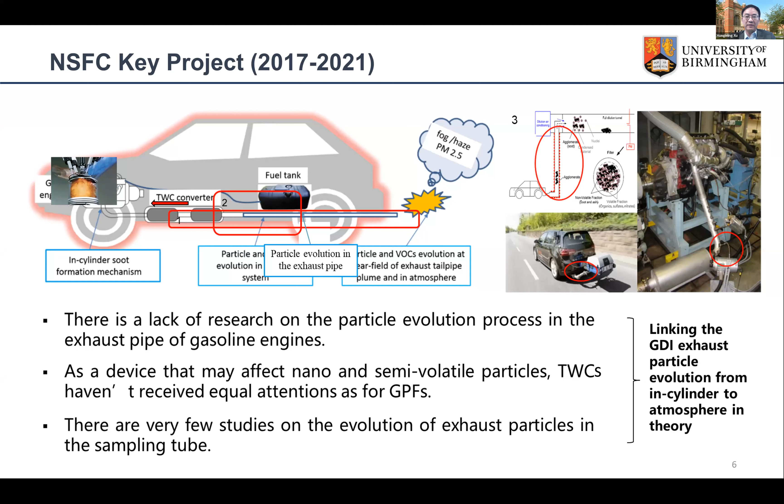This is one example of the active National Science Foundation Council's project with China for 5 years, in collaboration with Cambridge University as well, and Beijing University in China. The research is to study the evolution of emissions from vehicles, from the start of the formation of the emissions, and also the impact onto human beings and onto the environment as well.

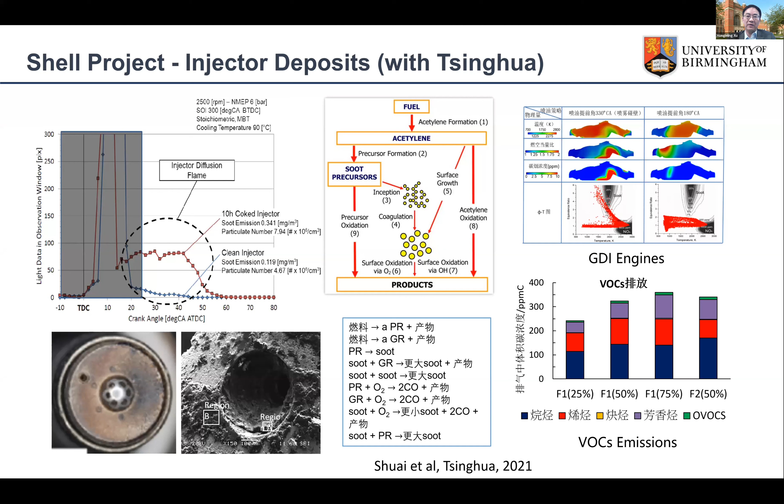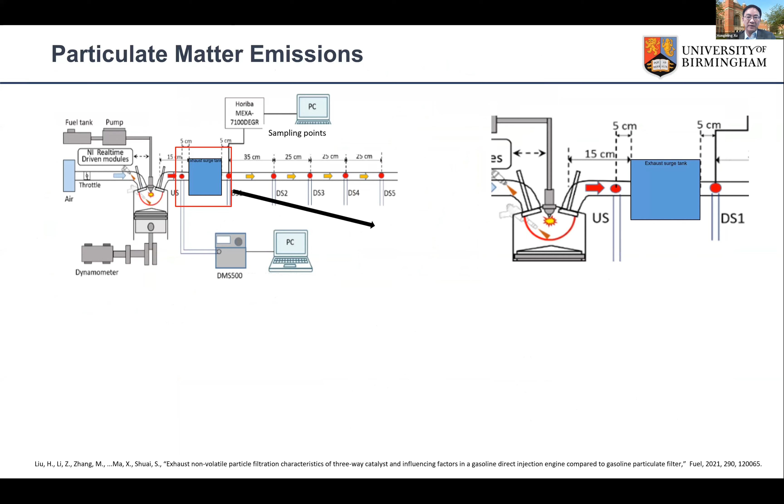And the research includes work in collaboration with Shell on injector deposits, which have a significant impact on the performance of the engine, especially for direct injection engines. We have been working with colleagues in Beijing University and Tsinghua University, and colleagues at Birmingham, using experimental and modeling techniques to study the particulate emissions for direct injection engines. This research is now extended to vehicles using electrical or electrified powertrains.

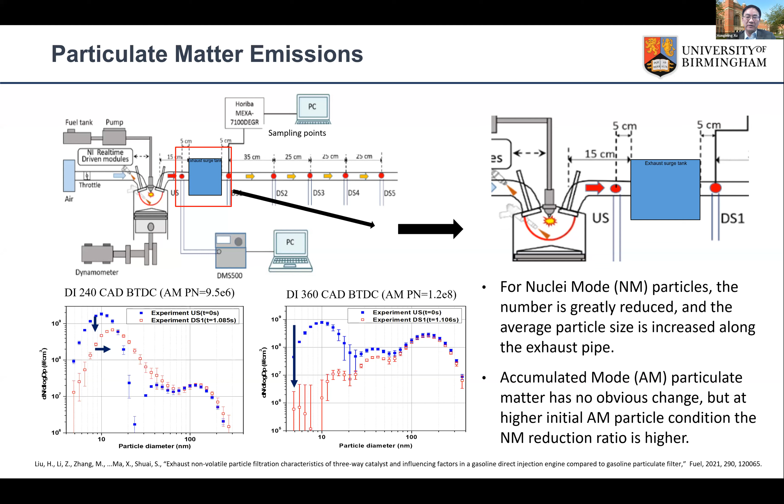The talk made by my colleague, Professor Roy Harrison, is one of the examples to show the work at Birmingham in collaboration with China. Professor Harrison is one of the lead scientists in this country working on vehicle emissions, and that work is now being extended to automotive research.

Again, in collaboration with China, here is one example: the project with the Suzhou Automotive Institute to work on electrified powertrains and vehicles, studying energy management and engine efficiency, using artificial intelligence for powertrain control, and improving vehicle efficiency in design, testing, and maintenance on the road. That is the future technology for vehicle control.

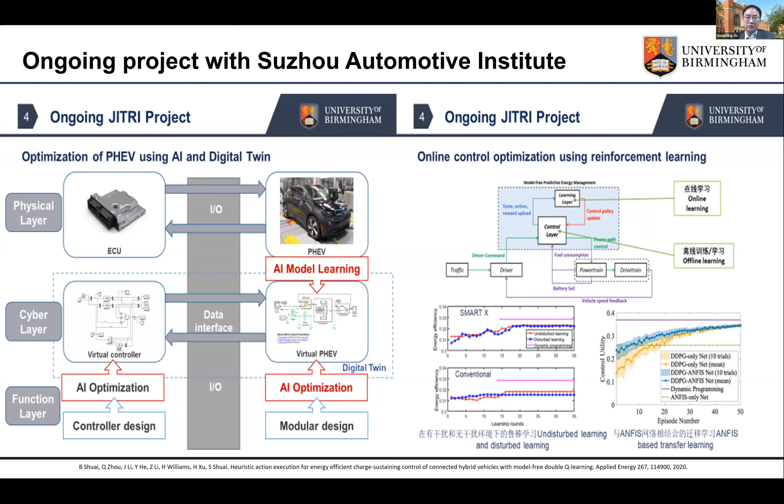With BYD, one of the largest automotive manufacturers in China and world leading in new energy powertrains for electrified vehicles, we study high performance combustion engines and electrified powertrain systems to achieve very high efficiency. The engine for the hybrid has reached 43% efficiency, one of the best in the world.

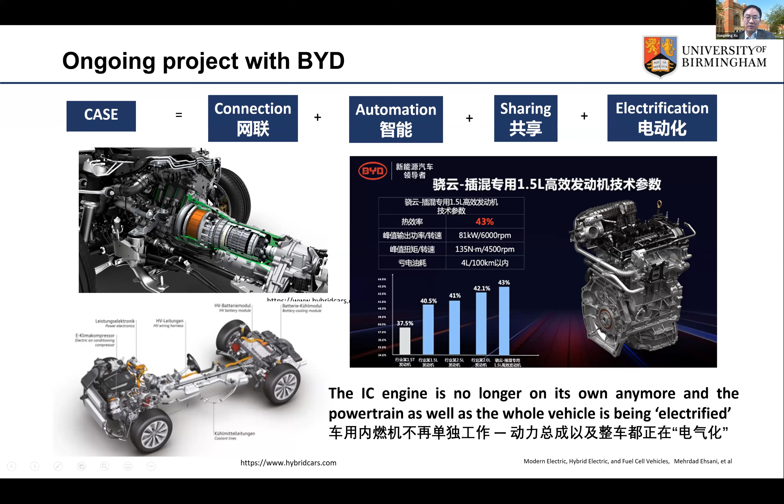With hybrid and conventional combustion engines, for many years we will see engines used in hybrids, so engine performance needs to be further improved and efficiency increased. In this project, we have developed autonomous artificial intelligence-based engine calibration methods using our own software for calibration on a production direct injection engine. The work continues for

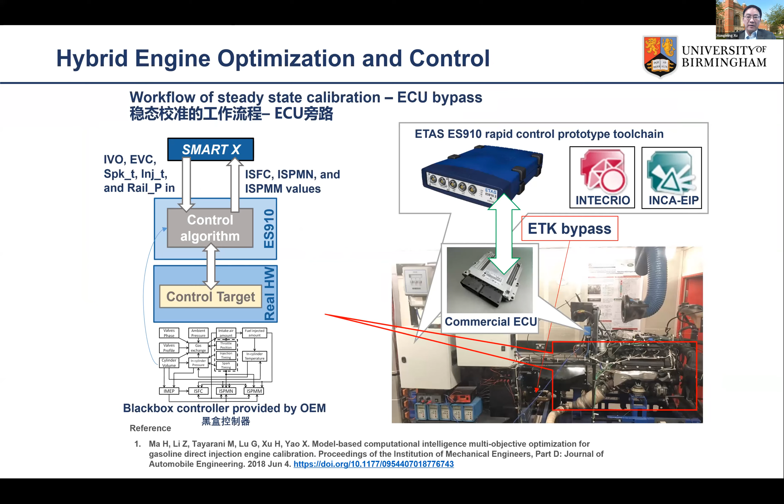hybrid and electrified vehicles and electrical cars. In the future, the engine-based testing facility will be combined with electrified powertrains and road information, using a virtual testing environment with big data and driving simulation.

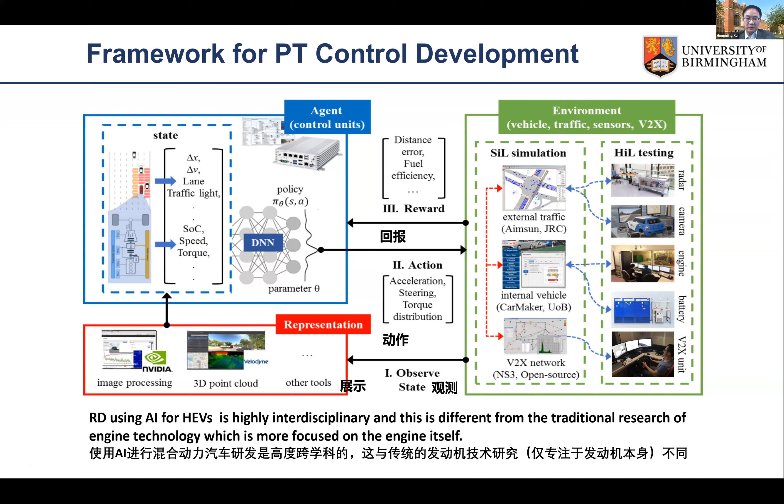Now we can study our vehicle's performance in our laboratory using both hardware in the loop and modeling techniques with artificial intelligence for future control of the powertrain and vehicle operation on the road. So that's a very short highlight of our current work with China.

Now we are moving to the new modern, so-called full modernization of vehicles, known as connection, automation, sharing, and electrification. There is a lot of work here, and we will be working with more and more collaboration with Chinese colleagues, and we hope to develop further advanced technology for our future vehicles.

So many thanks to all supporting our work. Without this support, this research cannot reach our goal for industry application and benefit to society, to the public. That is all from me, and thank you for your attention.

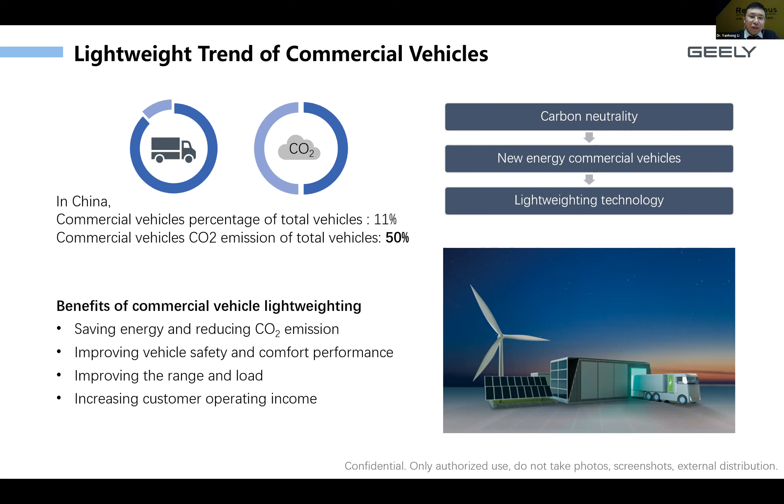There are lots of benefits of commercial vehicle lightweighting. For example, we could save energy and reduce carbon dioxide emissions, improve vehicle safety and comfort performance, improve the pure electrical range and the payload, and in the end the customer could gain more profit.

So what about lightweight technology? It refers to the use of modern design methods and effective means to optimize the design of automotive products, or the use of new materials, to ensure the overall performance of the vehicle on the premise of reducing the weight of automotive products as much as possible, in order to achieve weight reduction, energy saving, emission reduction, and safety comprehensive indicators.

I will give you an example about the lightweight technology implemented in body in white, which you may know very well. Body in white is the foundation of safety, durability, NVH, and vehicle handling, and is an important window to measure the technical level of automobile OEMs.

Next, I will give you some lightweight design technology implemented in Geely's commercial vehicles. Our philosophy for implementing lightweight technology in those commercial vehicles is based on two pillars: one is performance-driven material design, especially about safety, and the second is fuel economy-driven design.

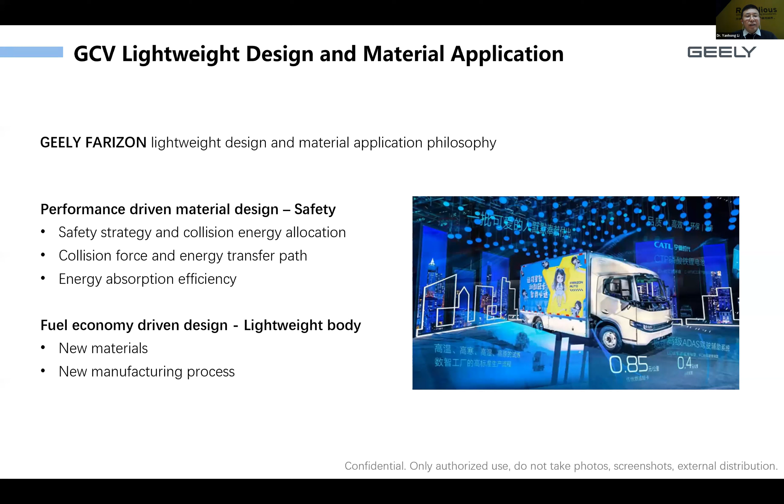We also use new materials and new manufacturing processes in order to achieve bigger fuel savings.

By implementing lightweight technology in those vehicles, we do our jobs in three major areas. The first one is about implementing new materials like advanced high strength steel, lightweight alloys like aluminum alloys, as well as composites. The second area is about structure.

We could use topology technology to do our modular design and structure optimization. The third area is about the manufacturing process, like connection, hot roll pressing, as well as precision casting, and so on.

We also achieve our goals through three different stages. Stage one, we promote successful lightweight solutions of the 2.0 platform. We newly developed the platform, realized platform-based application, and lower the cost of lightweight. Stage two and three involve material upgrading, product structure optimization, and introduction of new technology to achieve continuous weight reduction of the vehicle. We also do prospective studies to explore future light duty truck information and intelligent new technology in vehicle lightweight application.

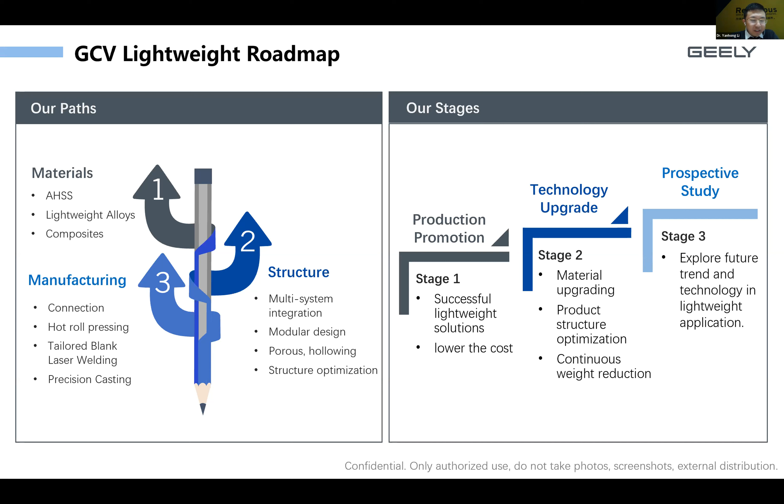This is one example about the BIW, body in white, where we adopted some new lightweight technologies. In the first stage, we do a preliminary study of lightweight solutions, then structure topology optimization, then we study the material and dimensions, do multi-objective optimization on the structure, as well as manufacturing engineering feasibility studies.

Then we do performance verification of the overall BIW to see whether we could achieve our weight reduction goal, as well as keep the performance level of the BIW.

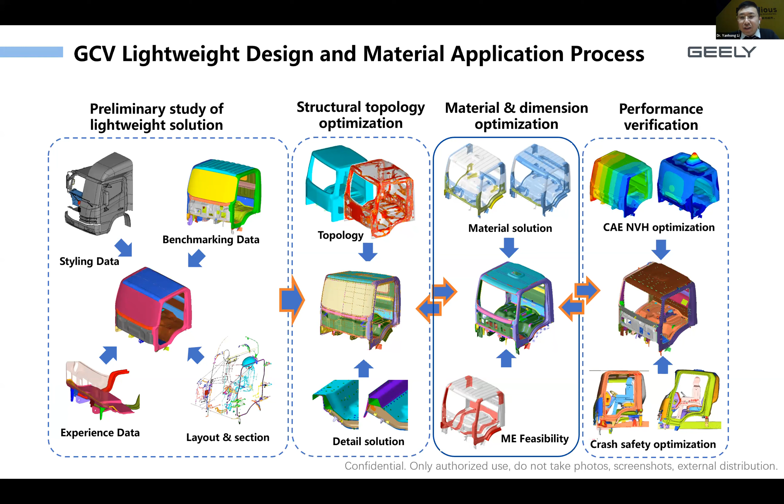Here is one example of using new materials in the BIW. You could see the red area of the BIW structure, which is the advanced high-strength steel we used. Previously we used less AHSS material, but for this new BIW we increased the AHSS material from 0 to more than 22%. The performance is not reduced, it's significantly improved, while maintaining low cost.

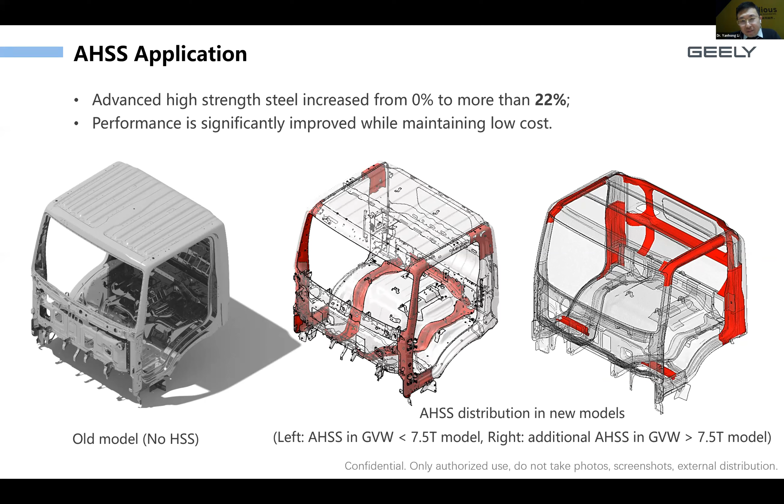I will give you the results. We also did lots of structure optimization, and we achieved increased BIW stiffness, increased passive safety performance, and reduced overall BIW weight.

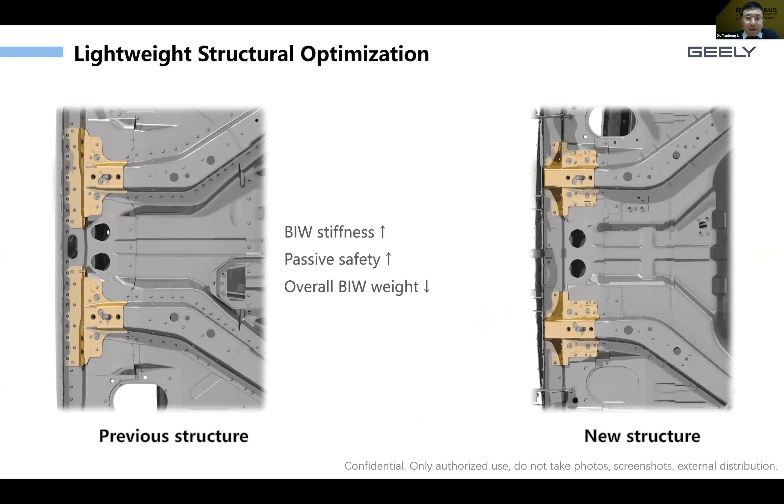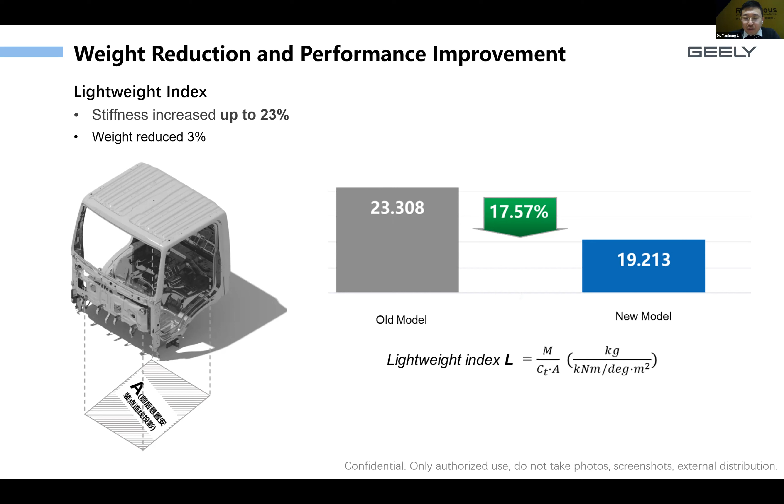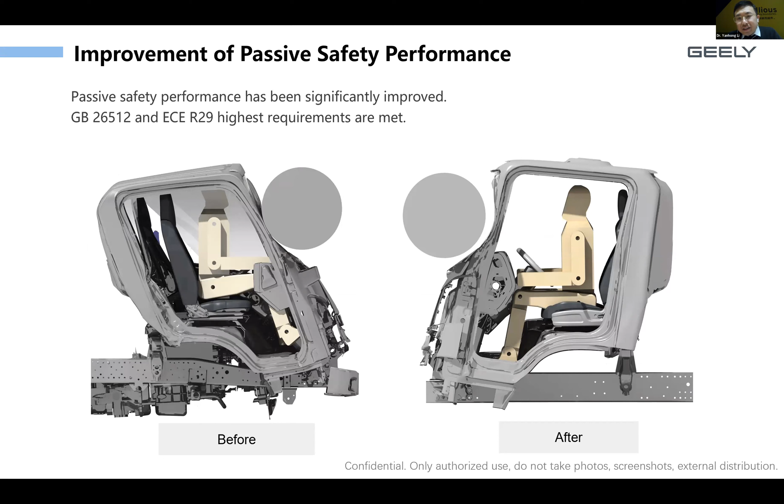Also, the passive safety performance is significantly improved by doing this lightweight technology study and implementation. This is the test picture.

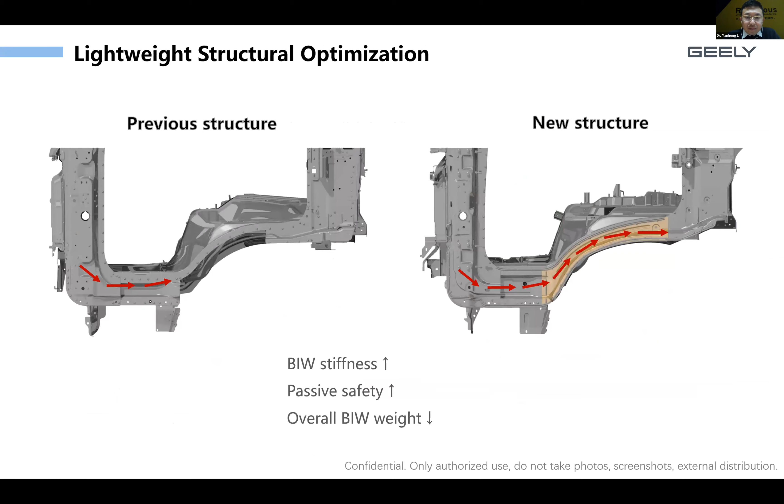Also, not only about the BIW, but also the suspension system. For example, for the leaf springs suspension system we used for a light duty truck, we use a steel plus composites combination for the suspension system, so we could achieve a weight reduction up to 42%.

Furthermore, we designed a glass fiber composite suspension system, so we achieve more than 55% weight reduction, which is a big result of weight reduction for that system.

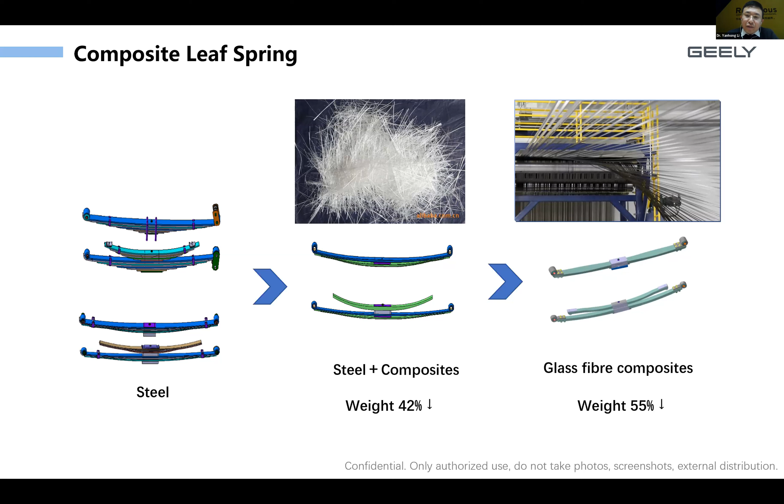Also, for the powertrain driving system, we newly designed an electric drive axle from the previous driving axle system. We achieved an overall fuel economy 5% increase, and the powertrain system weight is reduced up to 60 kilogram, but also the overall cost of the system is nearly the same.

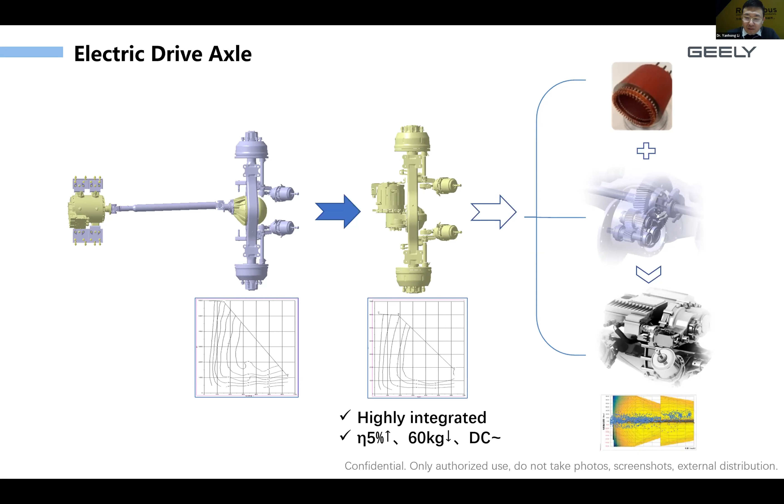So by using all these newly developed materials technology, as well as powertrain new design technology, we achieved up to 200 kilograms weight reduction for a newly developed light duty truck, but also kept the cost at the same level. That's just a very brief introduction on what we have done in this lightweight reduction area.

So finally, New Year is coming. So I wish all of you a happy life. Thank you.

Thank you very much for that very interesting overview of how you're approaching this whole challenge of reducing carbon emissions in commercial vehicles. Dr. Li made a few points there that we might come back to in the Q&A session.

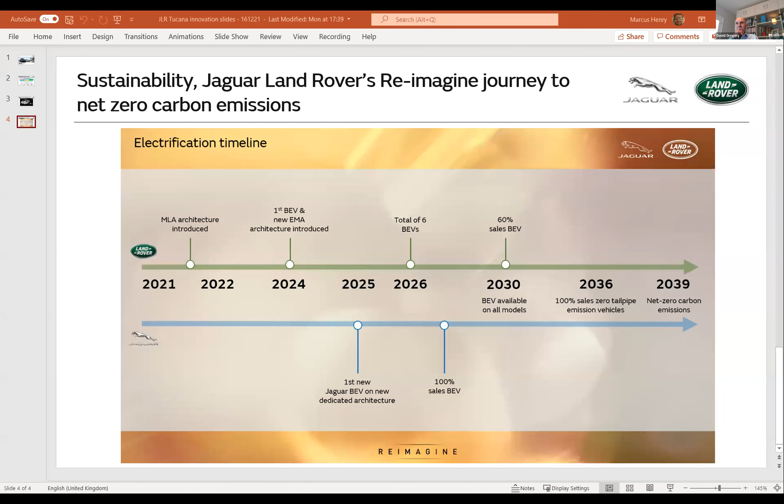Let me just share my screen. David, if you could just let me know if you can see my screen. I can. Well, thank you.

And some of what I'm going to talk about backs into what Dr. Li has just said, but coming at it from a slightly different direction, talking a little about time frame and then the bigger why of what we're trying to do. I'm conscious the title of this event is the use of new materials within the automotive industry, and I'll focus on that. I've only got 3 slides to show you.

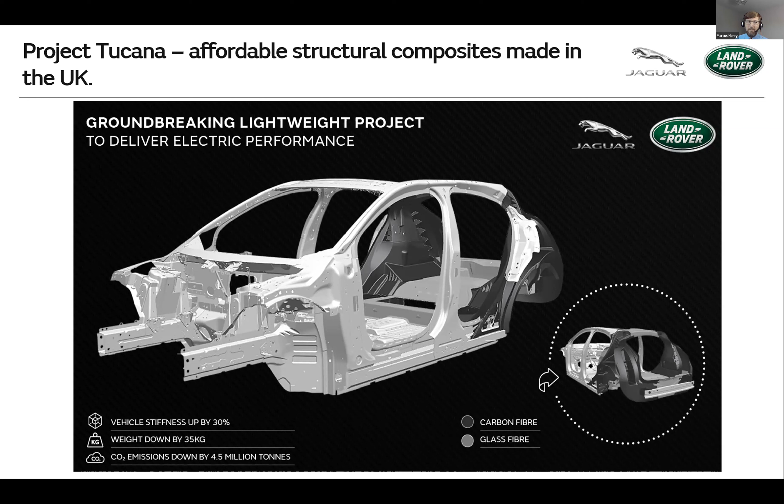But why have we done this project? It's about JLR's sustainability journey. We call it Reimagine, and it's a journey to net zero carbon emissions. We're transitioning by fast electrification across all models. You can see a schematic of Land Rover on the top and Jaguar on the bottom, with zero tailpipe emissions by 2036 and net carbon zero by 2039.

Now, not many people I've met understand what net carbon zero means, let alone how you measure it. For full measurement from ore or mining through to end of life, how will the legislation work? Will this be taxed?

There's so many questions, but what we need to do in Jaguar Land Rover, and we have done, is disruptive new technologies that help bring us along that journey. And that journey, as you see, by a timeline of 2039, only 17 years. And if we refer back to my first of 3 slides, new technologies can take 11 years to get into a showroom. So if an average vehicle life is 8 years, technologies we start today will impact that net zero in 2039.

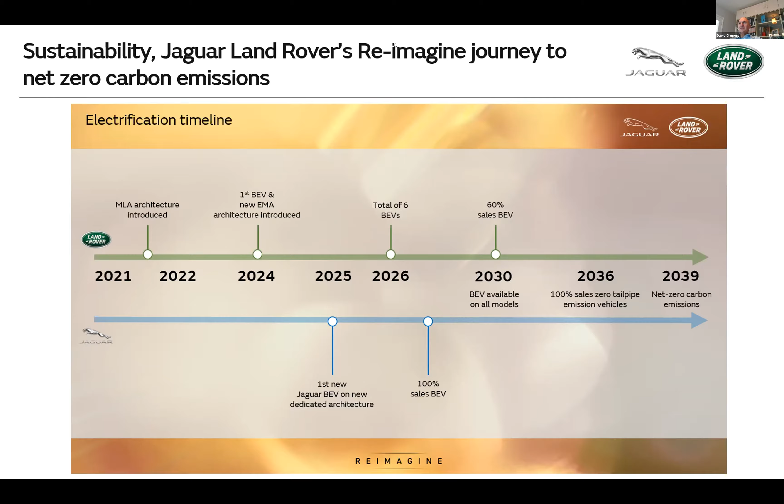Thanks, Marcus. Look, I thought that was really interesting. You've used 3 slides and given a really great picture there of all the different complex issues that come into play. As you say, the idea is starting at academia, and it's a long journey to get from there to the showroom. I think that's quite an interesting point that I hope we come back to in the Q&A: given the deadline set by the government and by JLR themselves, it's almost mission impossible, you would say, but we'll get into that.

We need to, and this is why it's important to work together. If it takes us 2 years to prove a new material, why are we doing it in isolation? But as you say, Q&A session. We'll come to it in the Q&A, but thanks for that, Marcus.

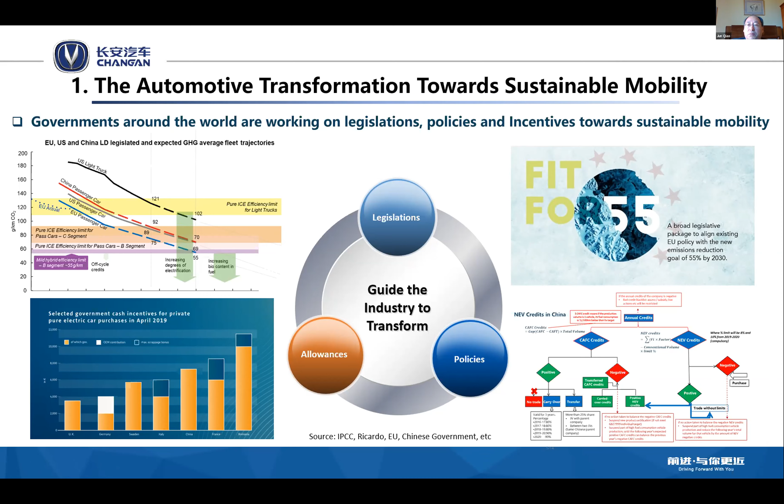So the second aspect, we'll talk about new materials and how that plays into this new transformation. Briefly looking at today, still over 90% of our vehicles are produced and powered by internal combustion engines.

The only exception I would like to emphasize is actually the pollutant emission treatment device called after-treatment, particularly the exhaust catalyst. For that aspect, we just can't get away with cheap material—we have to use precious metals: platinum, palladium, and rhodium. So those materials are expensive, but we try to use them as little as possible. Okay, so that's today's picture.

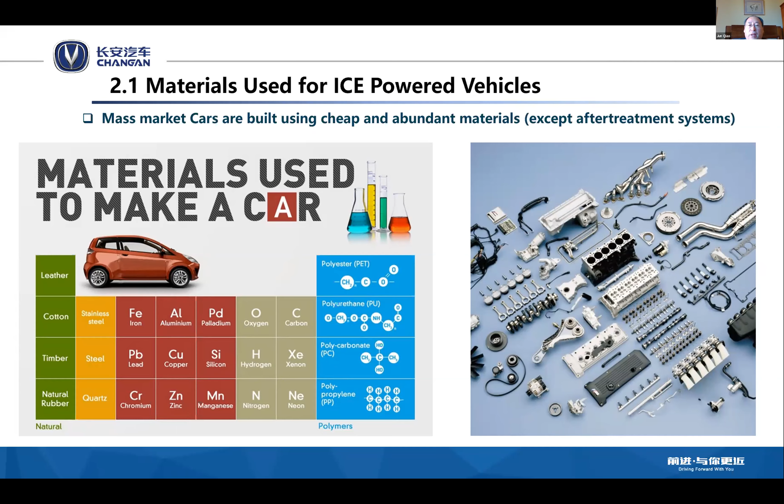So if we go towards the longer term, post 2025, 2030, clearly everyone's predicting more and more electrified vehicles. By electrified vehicles, the first thing you need is basically batteries. So the battery is the so-called new oil.

It's increasingly becoming important, and the material used to produce batteries gets more and more attention. Today, if you look at primarily the battery material Tesla uses, those are nickel, cobalt, and aluminum ones, and those are mainly for the battery cathode.

You can also use others like nickel, cobalt, manganese, or other things more exotic, but still at research stage, like lithium sulfur, or even much longer term looking at lithium air. But today it's very much just lithium metal oxides.

For the anode, we still use graphite. But for collectors, we use a lot of aluminum and copper. So all those things are also in play.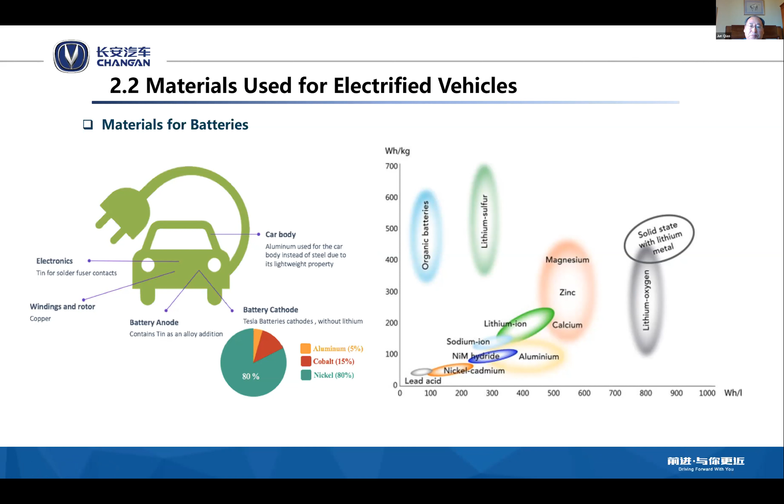The next generation batteries, so-called solid state batteries, basically use solid state material to replace the electrolyte, the liquid forms, and those also have a lot of new materials people have been looking at. So that's briefly looking at the battery side of material application.

And the second thing, as we go towards electrification, increasingly the electric motor is replacing internal combustion engines. Now, electric motors also come in all sorts of sizes, shapes, and types, but by far the majority type is still the permanent magnet machine.

The permanent magnet is actually made primarily from rare earths. They are a group of 17 elements. I'll try not to pronounce all of them, but they all have quite exotic names. Clearly, the biggest element used for permanent magnets is neodymium.

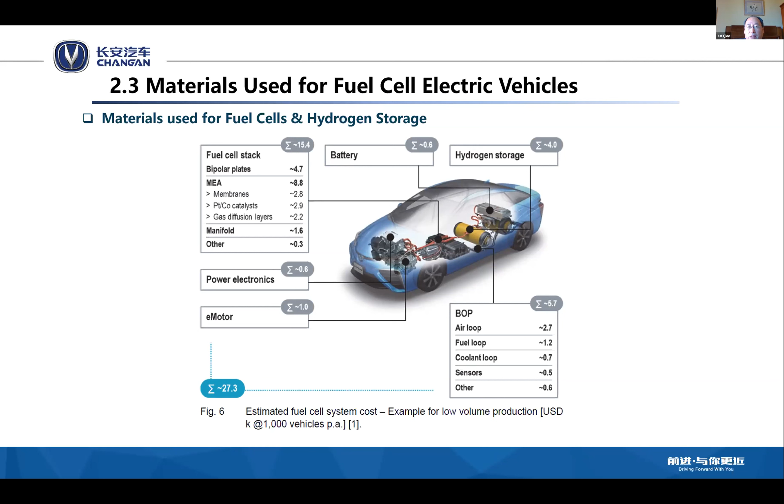Even a simple thing like air compressors isn't the standard air compressor you can buy, because those actually have very little tolerance to lubricant. So we had to look at things again, trying to compress air without the traditional lubricant in there. So we had to look at a new way of doing things.

So that's just to give you a sort of big picture overview. And I will briefly look at my own company's practice.

Now, Chang'an - probably in the West not many people have heard of us. Well, I used to joke that this is the largest car company you never heard of. But in fact we're actually a very old company. We are actually older than Ford. The company was established in 1862, so if you like, we are going to celebrate 160 years of the long history of the company.

Although in terms of making cars, we only really started in 1984. As Mark mentioned, the car industry's product development cycle is typically very long. If you use an 8-year product cycle, that gives us less than 5 generations of vehicles.

But we have been fairly successful. In fact, from January to September last year, we already made and sold over 1.7 million vehicles. And last year in total, we sold more than 2 million vehicles, including some best sellers in their own sectors, things like a smaller SUV we call the CS35, and a larger SUV we call the CS75. So those vehicles are actually selling very well.

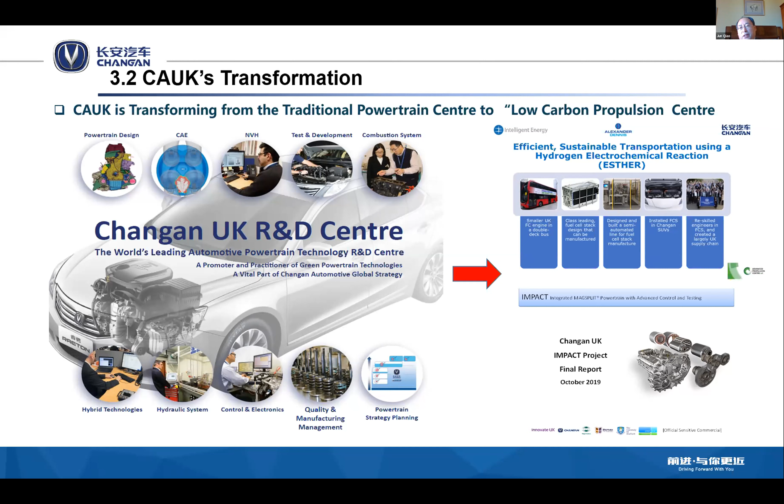Through this transformation, we found lots of new opportunities, and we're actually very excited about this opportunity of going towards electrification. That space is open up for new research.

So I just briefly talked about the first three parts. Now let me summarize. What we see is that the industry is clearly moving away from internal combustion engine powered vehicles towards a new one - I call it the small letter 'ice'. The I stands for intelligent vehicles, C is connected, and E, I would say the bigger one is environment friendly, but right now it's primarily looking at electrified vehicles - electric cars, plug-in hybrid electric cars, and also fuel cell electric vehicles. So although the letters on the surface look the same, the content can be completely different.

In fact, the car industry has already gone through four generations. Generation 1 was a pure mechanical device, the second introduced some kind of electrical control, and the third started to look at more hybrid vehicles - part mechanical engine, part electric machine driven. Now it's going towards the fourth generation of completely electric driven vehicles. As I say, this journey has just started, so we're all very excited about it, and we're doing a lot of research towards it. I have no doubt that new materials really underpin all of this transformation.